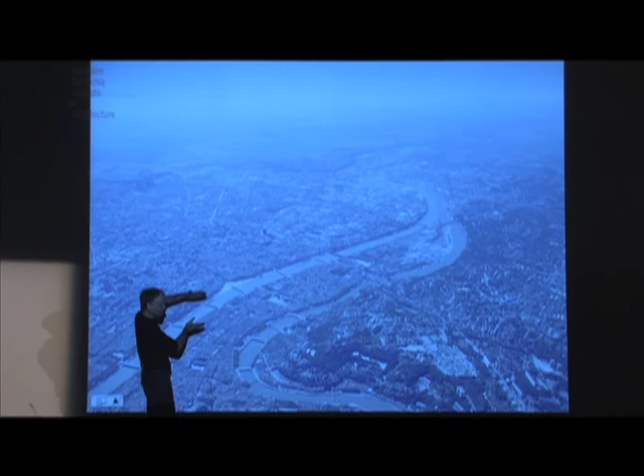Essentially, what you have is this fantastic condition of two rivers that come together, called the Saône and the Rhône. Where they come together at this point is the Museum of Confluences, under construction right now after a long gestation. Old Lyon is based on a kind of Renaissance Italian interest in squares, extraordinary periphery conditions around those squares, a series of intimate square spaces. And of course, these buildings have facades, but really never interact so much with the water, as opposed to the bridges, which are these lineal moves.

And then what you have in Lyon, which is extraordinary, is that all of that stops, and this area was a swampland where we found prisons, hospitals. In a way, the unwanted of the city lived here, and right up until, I would say, even into the late 20th century, this area, which was the old docklands, was a big area of prostitution, drugs, etc. What's interesting is there has been a transformation of this area recently to become one of Europe's, the second largest construction site in Europe, with a series of competitions involving a lot of different architects.

We're involved on this edge here. And that edge is remarkable because just across the way, you have what is really one of only two conditions like it in Europe. One is in Prague, where you have this condition of a bucolic landscape edge coming down into the center of the city. You have this kind of absurd contrast between one side, which is green, bucolic, with vineyards, churches, Catholic institutes, etc., and the other, which today is rapidly becoming an urbanized edge condition. So here we have two sites that we won in the competition along that edge. I can explain it a little better if I move on.

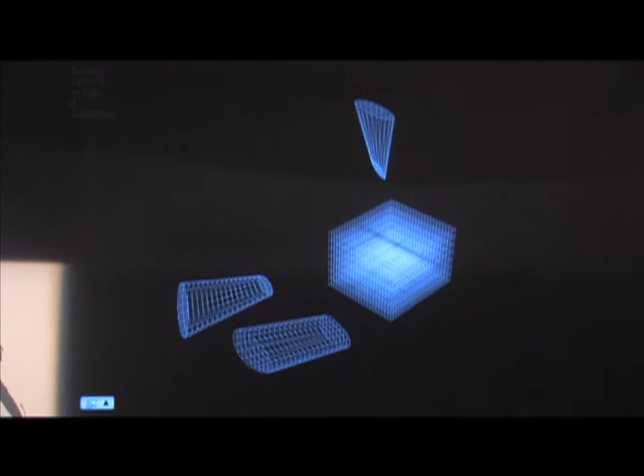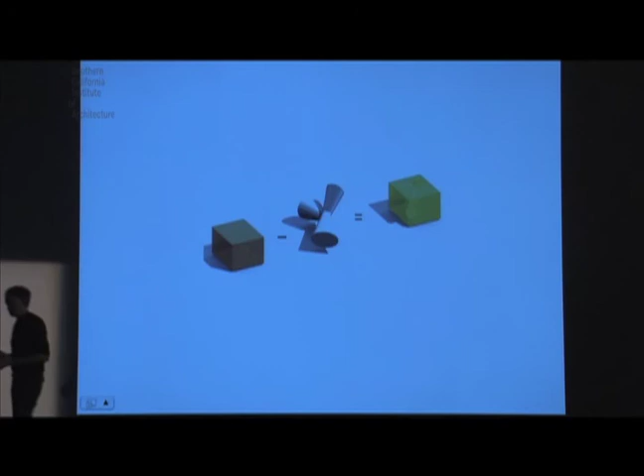So if we develop these further, taking the orange box itself, the orange cube, what's interesting about the tripartite volume is that the normal way of going about a box like this in Europe, as in America, involves very strict rules about how far you can go back in terms of getting natural light into a building for working conditions. After that, you're meant to develop a solid core. Or, inversely, you have a vertical core, a courtyard inside the building, getting light from both sides. In this case, we knew we couldn't do it all the way through, and in a sense we weren't terribly interested in that.

What was interesting with the cultural levels is we didn't need to get any light into those two levels. So it led to this idea of a U or conic condition, which both cores the building and then cores out to the river.

So here we're interested in both the view out to the river and the edge, dealing with this idea that maybe for the first time in Lyon, we can get people to start looking at this natural condition, the river as an edge condition, brought back inside the building. We thought that was a unique chance, because the way Lyon was built in the past, like a lot of cities, was based on precedents, and doesn't really treat the condition of the river and its influence as a fluid medium.

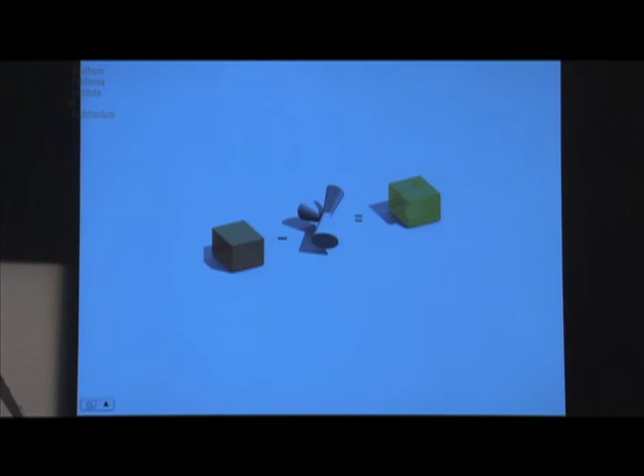So I think what's interesting here is we start to bring some of these interests together. We were also in a district with heavy environmental interests, so we had to come up with rules that could articulate air through the building and climatize it naturally, non-mechanically.

In the end, we have a double solution of mechanical and naturally ventilated design. The idea of the court, of course, is that it can become a chimney for air.

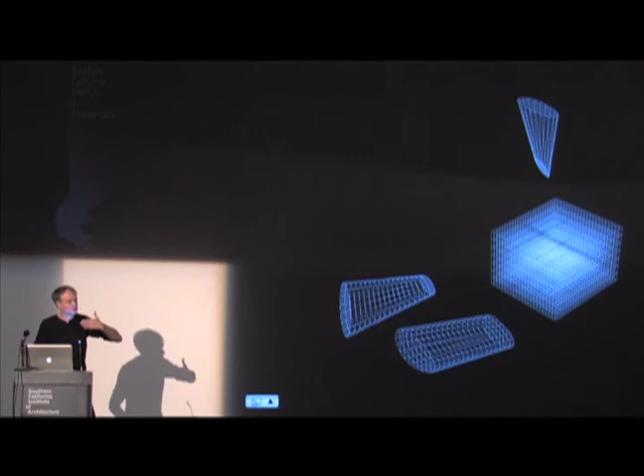What interests me here, like in a lot of projects, is that as you gradually move from conception towards dealing with the micro rules, along with your bigger concepts, those concepts somehow become more informed, or in some cases one deletes or takes out certain things. I think that's a very interesting aspect, because the whole process of building and making something is inherently related to your conceptual ideas, and the validation or non-validation of those. As they move through the project, it essentially has a strengthening effect, this phenomenon of picking up speed with the project, which I think is very important.

So these are just images which start to deal with this idea of conic interventions, leaving a resultant coring of the project as we move through the issues.

There was a series of tests that we did with air conditions, different air movements along the rivers. As you know, rivers through cities are often the major air highways in a climatic sense, so those air highways are very interesting to hook into. In this case, the cone worked really beautifully in terms of bringing air through the building and through a chimney effect, moving up through the roof.

The first building to be built in this sequence is the orange one. One of the pieces we're studying next is this building here, which we'll begin building normally next year, for Euronews as their headquarters, which is an interesting experience. This building works well for them because it's all about seeing and hearing and somehow transforming information.

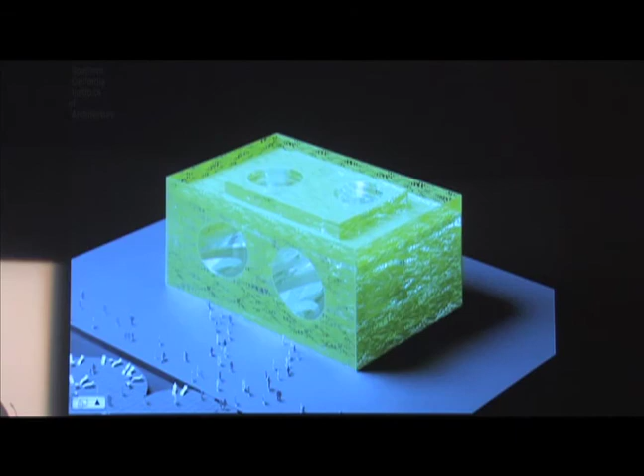Here we're back to the building, the orange cube, which I'm presenting here. Those conic interventions become interesting in a number of ways — I've talked about the air, the views, and the idea of the light.

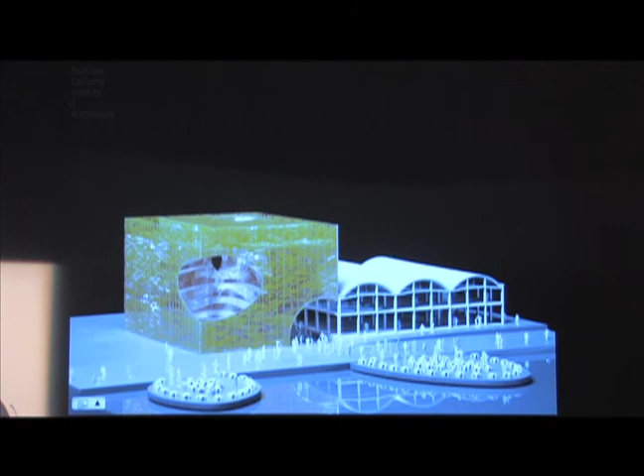Also, our project isn't just involving the orange building, but an earlier building, the salt storage facility. Right along this edge there was a series of industrial units, mostly related to boating on the river — storage facilities for boats pulling up alongside. In this case, the conic volume as an outtake becomes interesting in its relationship, a slight tilting of the hat towards the existing geometric condition of the roofs of the existing salt buildings. These are just models taking us through the site plan.

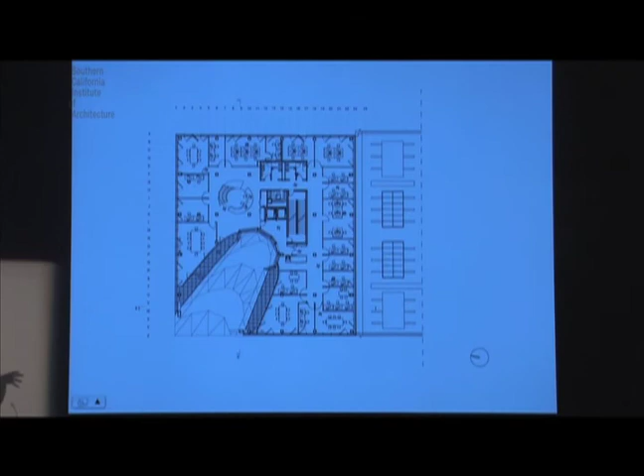Looking down through these pavilions takes you through the different floor conditions. What we end up with are these very interesting huge balconies on every level, giving all the participants within the building the ability to go out, have a cigarette, or use the space as a communal space. We see these as a kind of communal window space onto the river.

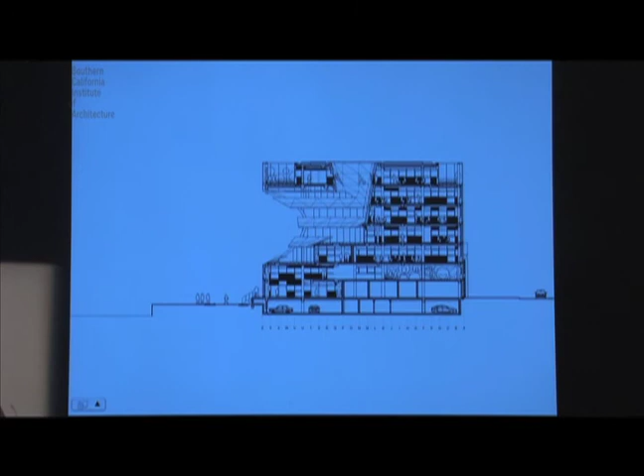But it's a strange space because it's both a window, a chimney, and a light condition. It's porous, and that porosity can be seen in these different views. And here we are under construction — it's still not exactly finished, but we're very close. These are photos from this year.

As we move around the building, what we end up with is kind of a parallel climatic element, which is quite important — the skin. We have a double layer skin. The inner one acts thermally, dealing with all the thermal problems of capacity, input, and outtake of the building throughout all the seasons. The outside skin, which is almost like a lace skin, deals with letting as much light into the building while reducing, like a veil, the amount of solar input into the building.

So that's hence how the project developed. I should say what was very interesting is that when we won the competition, as you can see in the models, we imagined them as completely glass blocks, with a serigraph, a frittage on the paint, dealing with these problems of thermal light, etc.

As the thermal laws changed radically in Europe from winning the competition and going into the phase of studying the thing to be built, we went up against a major problem: maybe we couldn't even build the orange box, because the thermal laws negated the idea of doing it in glass. So we had to imagine the building differently, and instead of being transparent, we turned the thing on its head and said, why don't we just start with the idea that the box is completely opaque?

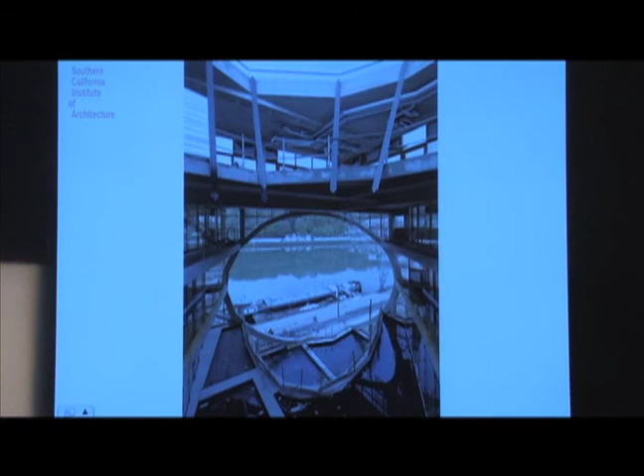So by cutting into that facade, digitally cut, with a digitally cut perforated surface, we started to deal with the problems of thermal and solar intake. These are views out to the river. Each level, as you go up through the building, you have this very strange optical experience of it becoming a cube and moving up into a circle.

And of course the views are different on what they're focusing on from each level. That's the interest of looking across the cone—one starts to see all of the levels and the people working on the different levels.

So what's interesting today is that we have this incredible transparency with the offices—maybe a little bit less transparent than what we showed in that earlier image.

Digitally perforated screens in 3mm aluminium, dealing with the problem of views out but reducing the solar intake, while keeping the box-like quality. And of course the language is a faceted language—none of it is a continuous geometry. Views around the building and views up through.

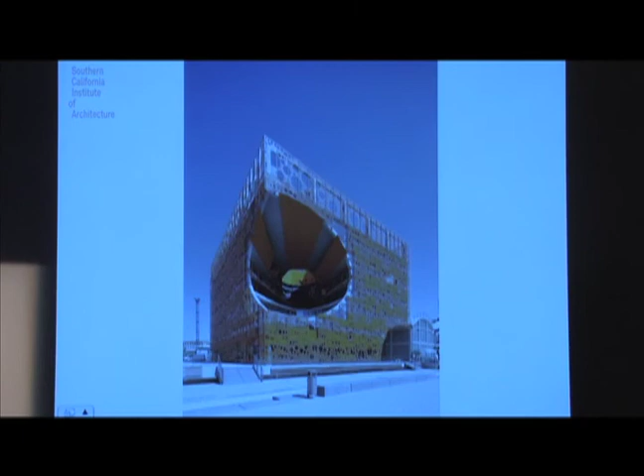Now we're starting to skin the insides of the cones. And we have a terrace volume, which again, urban rules state that the box on the inner part needs to be set back a certain distance from the facade. So urbanistically, there's a whole series of things going on.

This is that terrace space. And views out to the river, inside the offices, an urban view, another urban view—so you can start to see the relation of the river and the boxes.

In the future, what we should have, as shown in an earlier model, are huge floating terraces, which will be floating cafes in front of the water. You can see from the green model that those terraces are, in a way, the materialization of the cones as they come through, or the cone in this case—two of them—as they come through the building and touch the water of the river.

So the light conditions throughout the day—it's the classic ocular stuff. As that light turns, you get this extraordinary orange glow inside the offices. And here we're continuing to skin the beast. These images are about three weeks old.

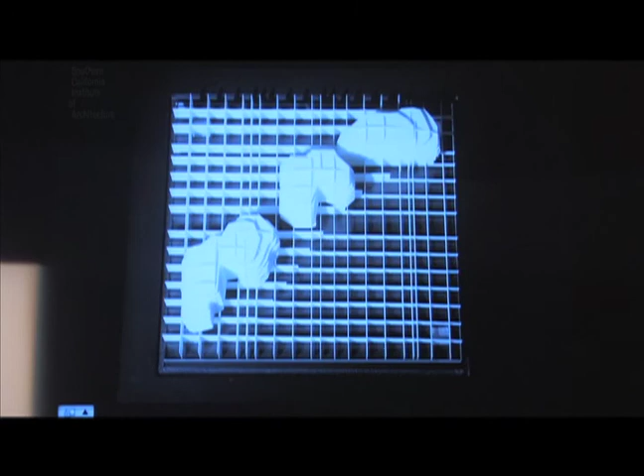And in this case, we had 8 kind of données. The site had been an old hospital in Paris in the 90s. There was a series of trees; we had to preserve about 7 old trees, 100-year-old trees. We had to build with Haussmannian setback lines. There were certain pieces of land with high concentrations of mercury which we could not dig into. And so the car park is split into 3 elements, etc.

So there's all of these things going on, which for us were fascinating, and of course interesting as an architect. You don't avoid them—it's not a rule—but for us, we're very interested in this issue of not avoiding, but actually trying to work with those issues.

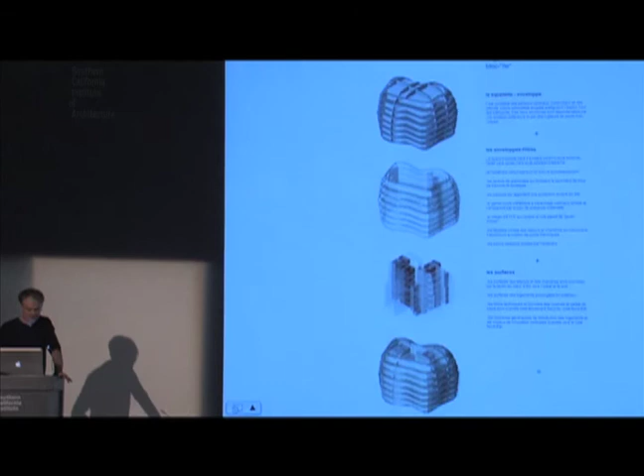So here we are going around the model. This, of course, is a later, finished clarification of what we're trying to do—the resultant elements themselves. This is just an earlier diagram defining, actually, we had huge restrictions, also environmental restrictions.

And again, I'm using the wrong word when I say restrictions, because we see these new environmental laws in France as being actually very interesting. Of course, as a designer, as a creator, to try and work for a better world is not so bad. And so how do we think about these issues that we may have in common? As Eric rightly pointed out, it doesn't come down to which party you're on—it comes down to interests of humanity. And as a designer, we have, as the French say, des chantiers gigantesques devant nous.

We have a lot of work in front of us there. So the interesting issues now, to do with all of this environmental, ecological kinds of issues being talked about in Europe, is that we need to be very careful to quickly move as architects, creators and thinkers with these kinds of rules that are coming to be placed in front of us. Why? Because it's somehow being able to work with them, conceptualize, be creative, and create an architecture that's about thinking, thoughts and ideas, informed by these kinds of issues.

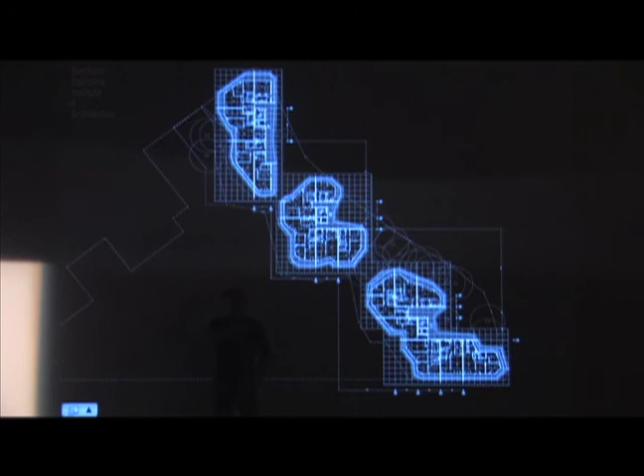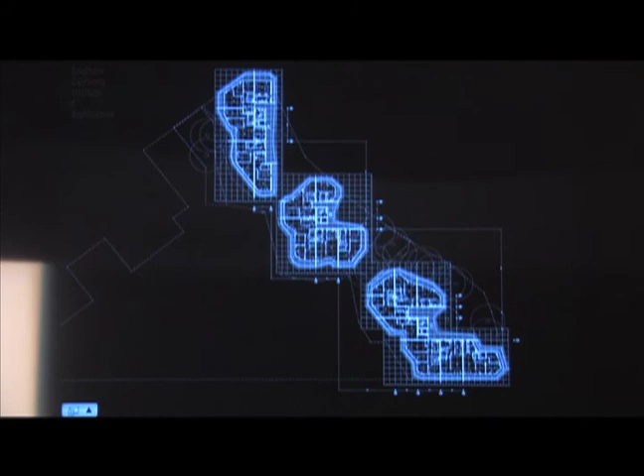In this case, we had a thing called the Jardin d'Hiver, and we came up with a Dutch company with this idea of making a shower curtain, which every owner, every apartment, could pull across in wintertime to create their own thermal space, adding between 8 and 14 meters onto a standard apartment. That was interesting because it's not just the bought square meters of the apartment—it adds on more space, so people end up with a living room in winter.

Hence we have balconies today with television sets, cats, cat play areas, and storerooms for people's unwanted furniture, etc. So in a sense, it's the most communal—the strip becomes, in a way, the most communal.

Becomes the most communal space of the project.

So if I keep going, this is the project from the roof of a nearby building. The solar panels produce 60% of the hot water of the building, so there are interesting issues there. This is the plastic skin as it's being pulled around in wintertime, so they become these sort of three-dimensional, somehow a kind of curtain thing which closes up. And then in the summertime, of course, each apartment is pulled back.

What we also have on each project is the levels, and the datum is quite important. At the level of the ground floor, all of the apartments in this building are for heavily handicapped people. It's social housing, so you don't own the building, you rent it from the city. The heavily handicapped people on this lower floor have a nurse full-time on site. And the garden, in a way, becomes both an extension of the living rooms of the handicapped people, but also a public garden for all of the 100 apartments.

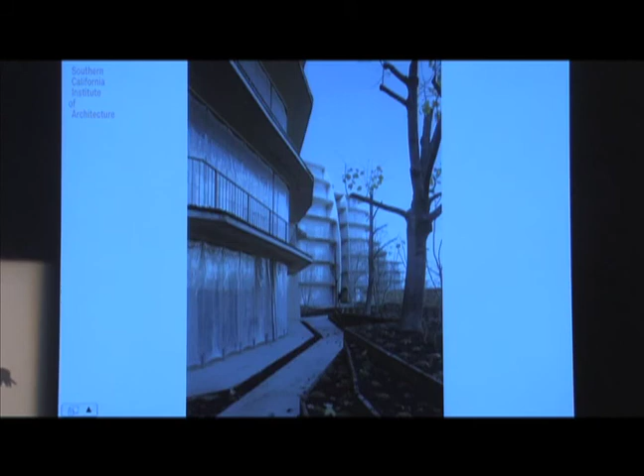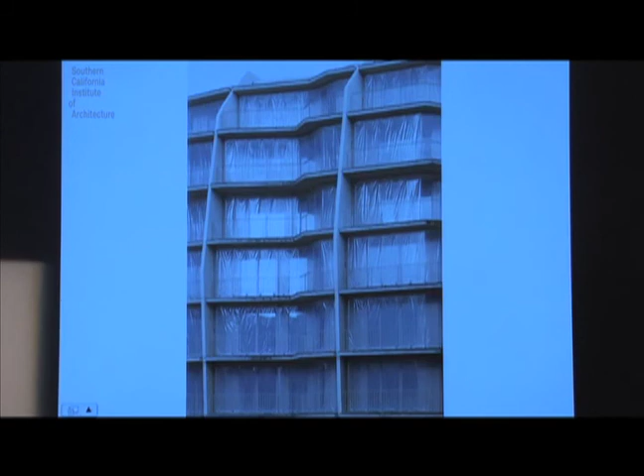That became kind of an interesting issue of how do we create shared space. There's a big problem in public housing between your inner private world and then the street. And somehow, where do people meet each other, talk, hang out, or don't they? In most cases they don't, and if they do, as an architect, you create these kinds of spaces, or in a way create these tensions that can create spaces where people pass time, talk to each other, etc.

So if I'm jumping around a bit, this is the apartment, the plastic curtain which is put in place. It's inside the apartment. Again, it's very sparse, very simple. The budget isn't enormous because again, this is social housing. But the idea is to get a lot of light. They're often complex pieces of geometry.

And in some cases, very large balconies, which become very interesting for people. Again, you can see the rail that holds the curtain. This is one of the guys putting the curtain up.

There's an 85-year-old guy that is seemingly very happy to be living there. And this is the kind of space that we have now.

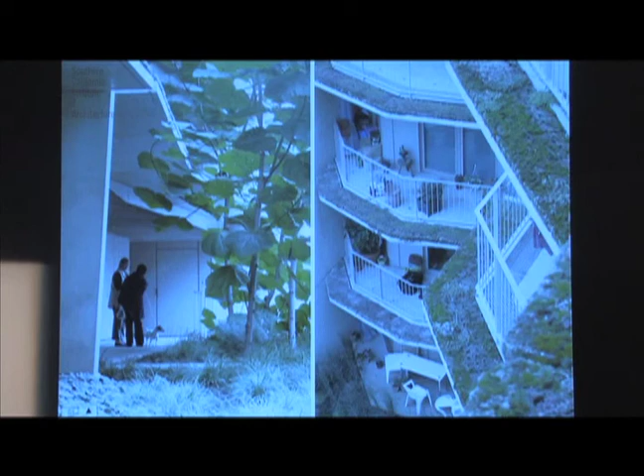We talk about the three hills as having a landscape datum. The primary one is that garden I talked about, and then on each level you have a volcanic rock edge, which is communally fed through a watering system, so it doesn't rely upon the individual watering it. This level, this tooth, as the Italians call it, is a brick on which lichens, mosses, and a series of different plants are seeded that grow at different times of the year on that edge. These feed into the communal spaces.

This is when the tree, one of the 100-year-old trees, has been really tightly cut back during the construction phase. But each of the buildings somehow becomes built, of course, around the space of the tree, and therefore becomes these.

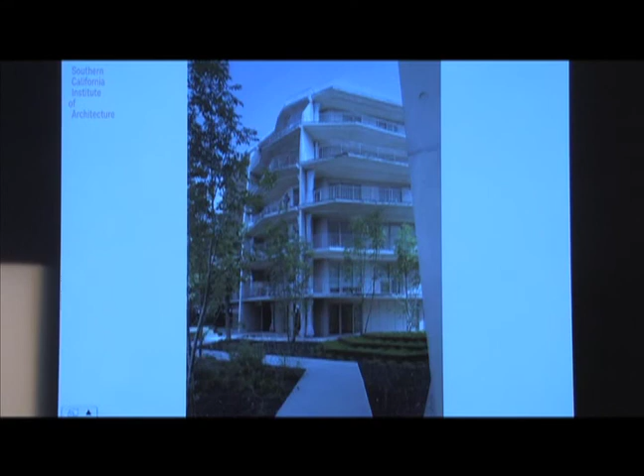Again, there's an aspect of how I was talking about this kind of eating out into the mews, this datum running through to the third building. You can see the boulevard there. So we drop a lot of height down into the lower conditions, into which we bring cars, etc. And viewed from a garden space which will be turned into communal gardening for the city at a later date, showing, in a way, the different levels and the way people are living on those levels.

The relationship between the three pieces. The project that Eric was talking about is the city. In French, it's called the City of Mode and Design, and it's this piece which in English, of course, is the City of Design and Fashion.

And why it's called that is because it was an international competition. We were 12 people that were finally selected. And each team, it was kind of an interesting case because a developer came to us and said, 'You want to be part of our team to come up with a proposal.'

We sort of balked at it in the initial stages because you're working with a developer and coming up with a piece of architecture, it's all going to cost money, and will we really be able to do anything finally. But we jumped on board anyway because, like any architect, you don't really balk for too long. And a lot of work, certainly, in this case we worked for a long time with them.

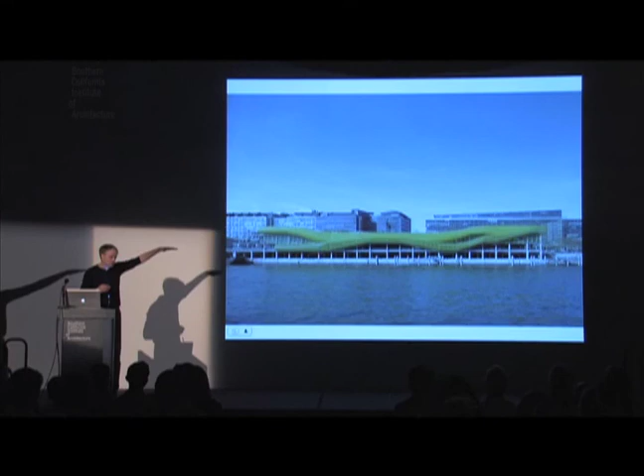As I was explaining to Eric before the conference, we've just had a big art fair inside the building on 3 levels called Chic, which just finished 5 days of having all of the Parisian public through the building, including major installation artwork on the terrace and galleries from all over the world in the exhibition area.

That was an exciting moment, and what we've had this year is the design fair, also in the building, with exhibitions by design schools from around Europe showing inside the building. So what's happening is the building is gradually starting to live and being opened up. We're not fully running in the left part of the building yet, but we hope to be running full-time soon. So the building's still not completely open.

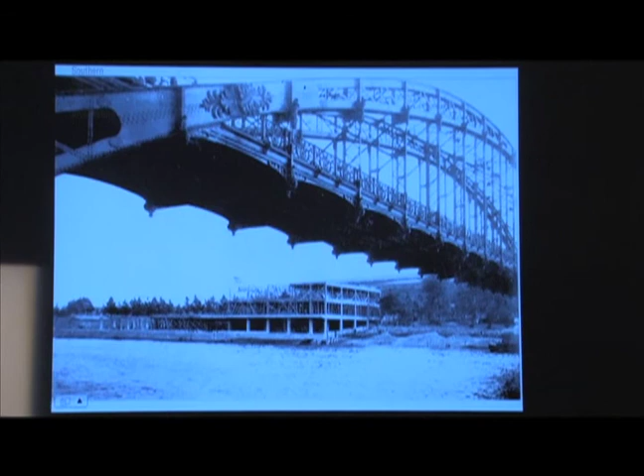Anyway, if I'm going to move a bit faster, I'm sure I should, that's the context. We're in an amazing moment, straddling the 19th and 20th centuries.

In the photo, we have the best of the industrial revolution, or the industrial and decorative version of the industrial revolution above us, and in front, another kind of aspect of that revolution. In this case, it was poured in place reinforced concrete, one of the first prototypes, around 1907. It was a building that interested Le Corbusier a lot, he wrote about it in a text. The Dom-ino House we're talking about is from 1914.

So we're talking about a building in the heart of Paris, and it was an ugly building. Parisians never liked it, but they were aware of it, and it's called the Docks of Paris. Like Lyon, I don't know why, but we end up with 2 projects in parallel conditions, one in the middle of France, one in Paris, both dealing with the issue of taking goods off boats, putting them in a building, and then dispersing them by steam train, horse and cart, etc. But the photo again is fantastic.

In the foreground you have people, I don't know what they were doing, searching, like an image of the Thames where people are searching in the silt, with a kind of primal, muddy emergence of water and slush. And in the background, you have this long tugboat, ocean liner of a thing. It was already actually a thing at that point somehow.

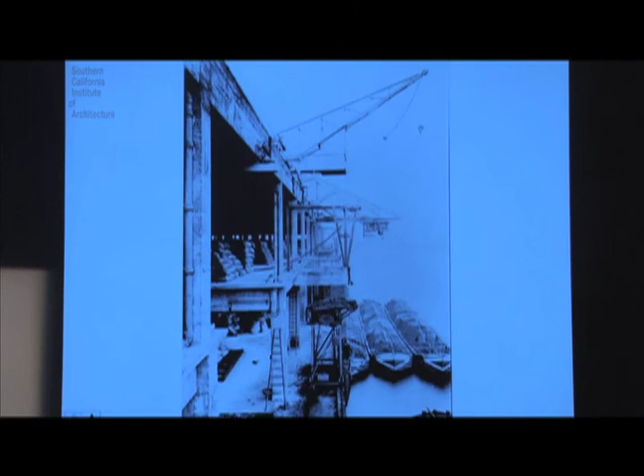And this thing ran across the roof on a rail track system. We're talking about a kind of... I don't know what you call them in America, but you know, the mechanism where you put money in and it goes along and goes up and grabs you a Mars bar or something. In a sense, this is a massive piece of that kind of equipment already built, as you can imagine, in a tilting moment between the 19th and 20th century.

Interesting stuff, and of course a building which would go on to influence the world. Here you can see the aspect of those cranes. On the back, what's really weird is that you had horse and dray taking all these goods off by horse and cart into the rest of Paris, or by locomotive under the building. So it's a piece of early infrastructure.

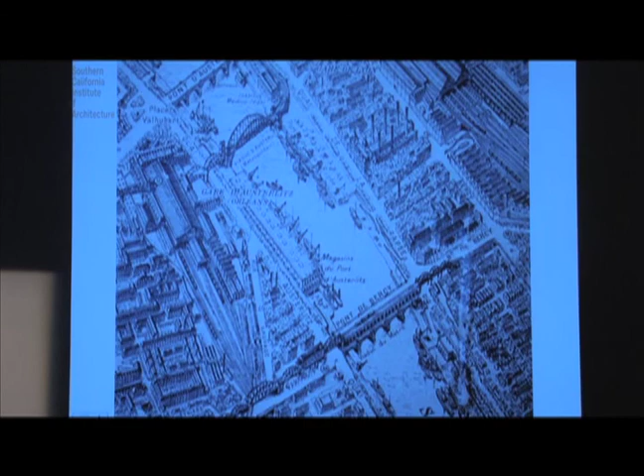As I said, it was considered to be quite ugly. It was never... we of course now recognize it to be quite beautiful in its own way, but it was, nevertheless, never an interest in creating a facade.

In the 1970s, 80s, you have this construction which is now completely filled with old nightclubs, rundown programs, but actually kind of funky and interesting. And it became also a building quite important to the cinema community in terms of the history of contemporary film, with a number of important movies being filmed in and around the building.

So the city of Paris said to us, do you want to demolish it or keep it, which was crazy. Of course we said in our program, the idea of demolishing it on an environmental level alone was catastrophic. But on these other levels, keeping it as a piece of a moment in history seemed really interesting to us. It gave us, Jakob and MacFarlane, the ability to place what we were going to do in relationship to it. Because I think it would be uninteresting, somehow in our work, to remove it and re-begin.

And so we became fascinated in the structure. We imagined all of this as being cleaned up, which is what we did in the project. And then we placed, as Eric was saying, a plug over. We imagined a kind of new skin, a skin which actually became a new structure, finding, in a way, the rhythm of the building.

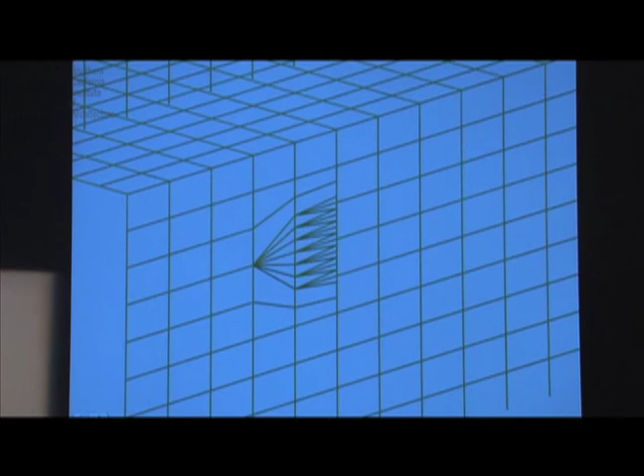So here, using that system, that led us to this whole issue of creating three-dimensional volumetric space, which could be birthed and killed where we wanted, anywhere across the site in a conceptual sense.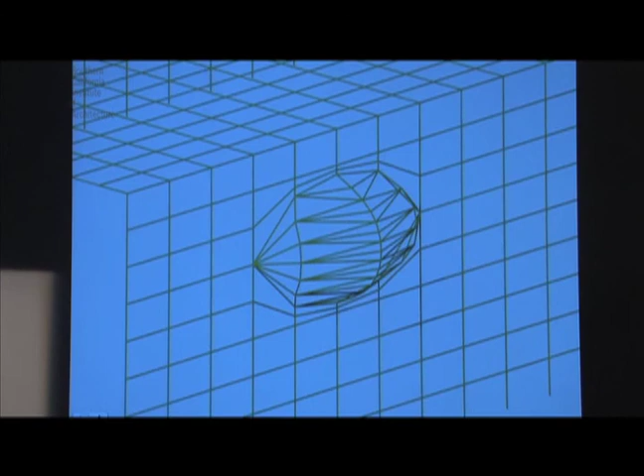So in that sense, we said, well, the most interesting aspect to the project was if we were going to deal with the Seine as the new facade, the front, then that front should really get the walkways, should get the idea of moving the public to the front of the building and then up across those levels.

That was essentially the important movement. The city gave us a 3.8 meter gallery of buildable space. So this thing that I'm calling the gallery, the invisible volume, they gave us that, and then they said you can build up one floor above the existing building.

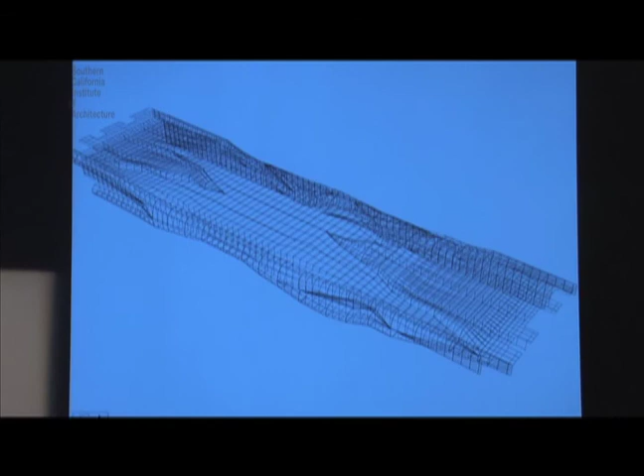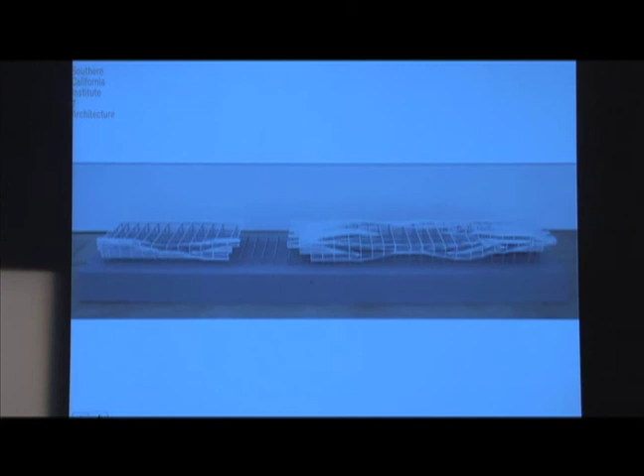So we developed this thing called the plug-over, and this is an early frittage model of it, showing in a sense the conceptual structural discourse between the existing structure in grey and the new in white.

The programmatic pieces, and then the plan, the plan mass, essentially on the roof. Urbanistically, we could build within this area.

We have, of course, the French love their axes, and we come through here. We have Hôpital de la Salpêtrière, which actually is an old hospital. These are the train tracks of Austerlitz train station, and there's a hospital, a little bit like the Pantheon, on axis.

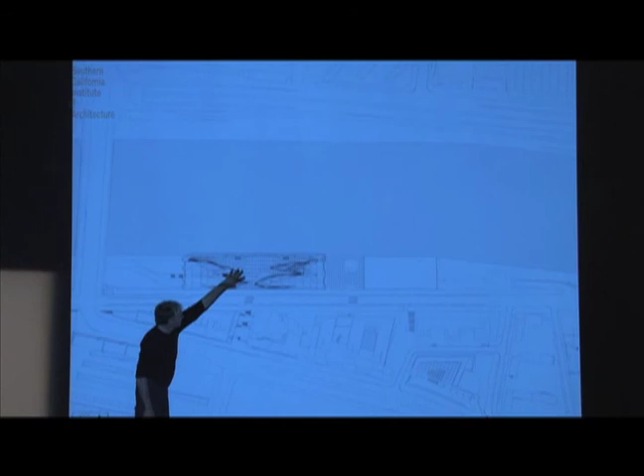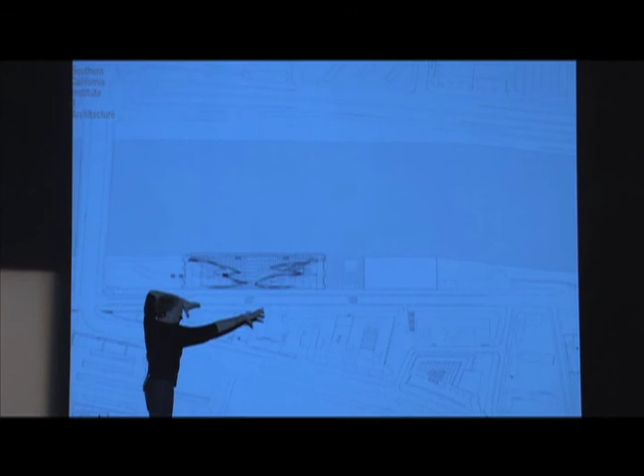So urbanistically, when you're on the roof, you have this extraordinary view out over modern 1970s Paris in the north, and 80s office buildings here, and then through here to the 18th century chapel, which has now become one of the art spaces, where they invite an artist once a year to exhibit inside that Pantheon-like space.

It's an extraordinary place. So anyway, we built to the left and the right, and as you can see, if I take you through the building, this is simply taking you from the level of the quai, where the boats dock, and then up through the building.

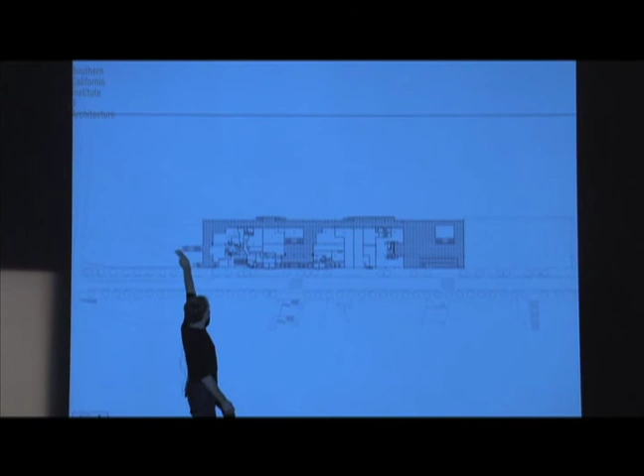So we have different porosities which we wanted to keep. We had conditions of leading from the lower level, the quay, leading from the street, bringing people through the building on that famous axis that the city wanted us to keep, and also bringing people up through a handicap ramp, etc., to that level.

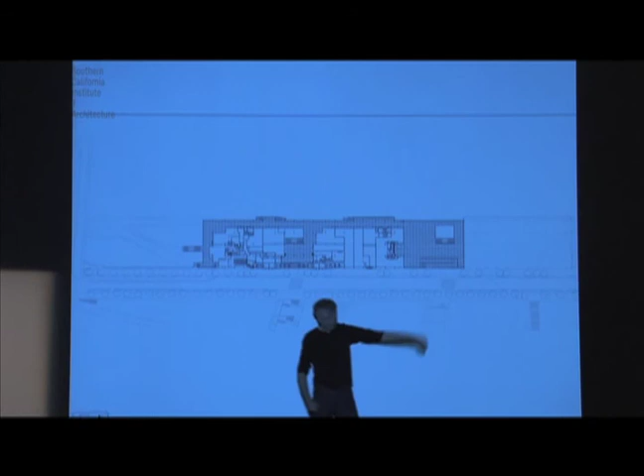So the new project is very much about reaching out into the city and becoming a lot more about filtering and more about connecting. I think that's an extremely important point. And also this idea of developing a linearity, as opposed to a transverse condition before in its history.

We were very aware of a whole new mentality shift that's gone on in the recent history of Paris towards the value of the bicycle, the idea that you're going to slowly get rid of the car from the center of Paris, and you're transforming the edges of the river from being just a museum to being a living river where people are moving up and down boats as they get rid of the cars.

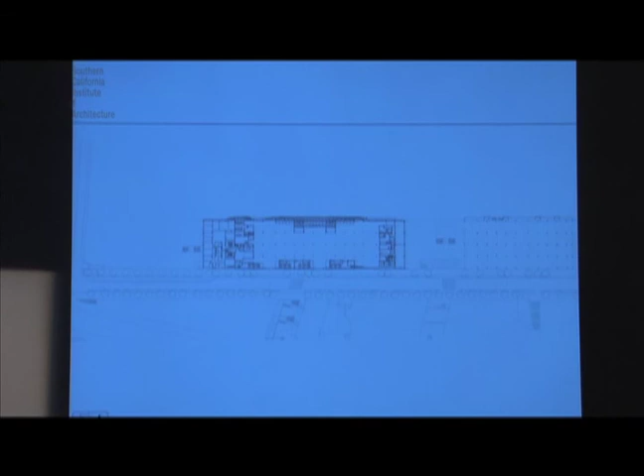They'll be living in cities on both sides of the river outside of Paris, transforming the river again into a kind of water route. This is definitely part of the green plan of Paris, and both edges right through Paris are being slowly transformed. So the building for us was very much about making it part of the city and integrating it absolutely within that future plan.

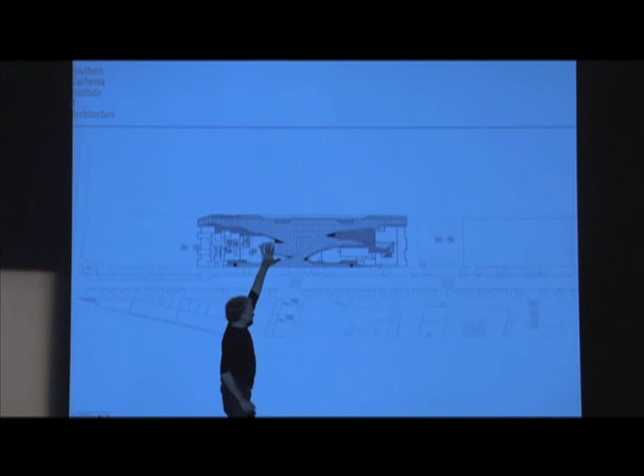And so moving up through the project, what we have at this end of the building is all of the Fashion Institute. We have a gallery space here, another shop here, and then at this end of the building we have a big restaurant going in, and then there's also a cafe.

So the terrace for us is like a new— we've always talked about this building as a kind of prototype for the future, where we can consider the roof spaces. This is nothing new, but it was a very nice opportunity to do it here, to consider the roof spaces as developable, really interesting developable surfaces within the city of Paris, as Paris is being blocked out and densified, or has been. Very few sites are left, except the roof. There's a huge quantity of extraordinary roof conditions.

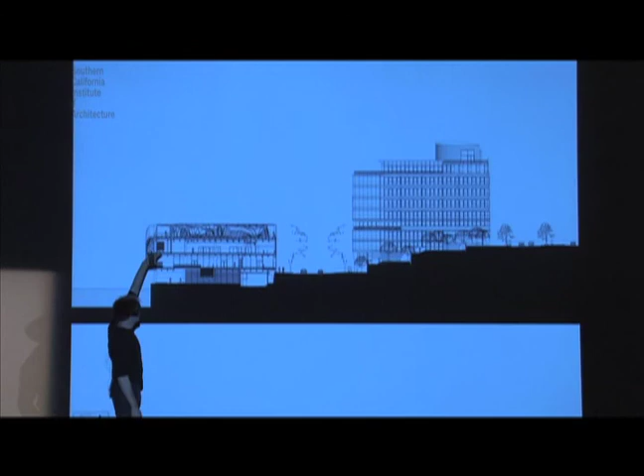So for us, this becomes a very interesting prototype for its possibilities of doing similar things along the river system and in other parts of the city. So we always talked about this as a plus, a new urban plus. What's interesting in that new urban condition—these are just different images up through the thing—is that you have a view out across Paris, and you connect with a completely new vision of both Paris and also the water. The plug-over is this.

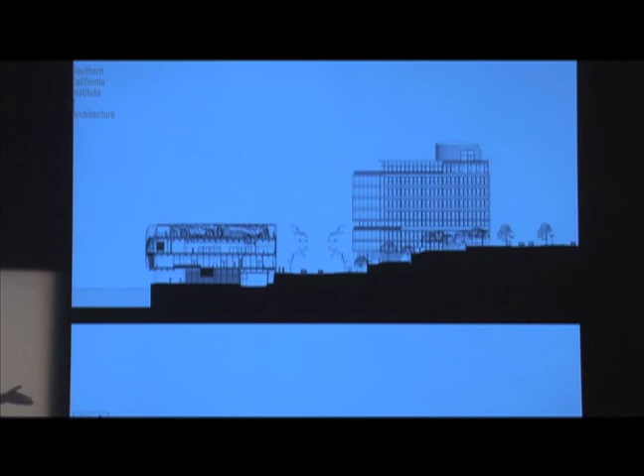It comes across and comes down very thin on that side. So that's like a gigantic U, extruded in terms of its gabarite right along the length. We never considered the building as a finished thing, hence this idea of chopping the building at both ends. It's like a continuous linguini, or whatever you want to call it.

In a sense, it has this kind of appearance, this aspect of appearing. And the way it appears and then disappears isn't so important. Hence this interest in the cuts. The more you build, the more you work, you can see parallels with earlier interests. Georges was about that—we're very interested in this idea of cut.

And it's non-precision somehow, or a non-definitive aspect. Okay, so I'll probably move fast.

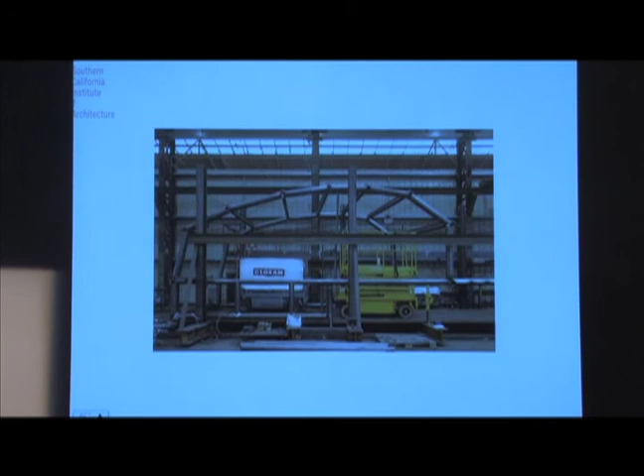Fabrication in Metz, where Shigeru was building the stuff for the museum. The fritage was, in this case, a double-layer piece of glass with the pattern inside. The pattern becomes very interesting because it's another way of bringing, like what we wanted to do with Lyon, but we couldn't—help with reducing the solar intake into the building.

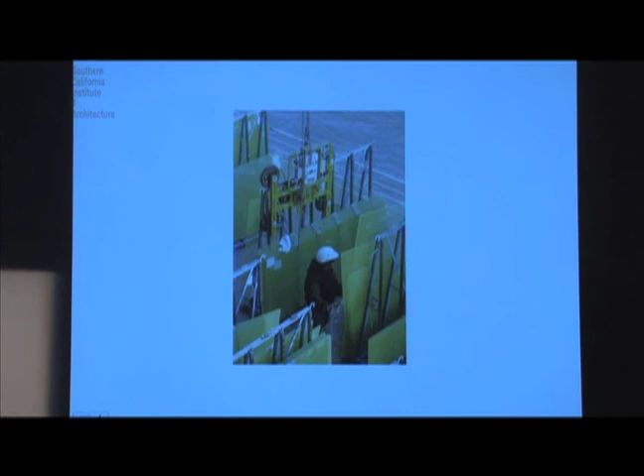We're very interested in structures that are growing over time. This was a nice, easy way of saying it's growing, because it was a construction site—of course, all construction sites grow. But what was spectacular with this one is that we really could play it out over a period of time. I'm not going to show you that, but I'm jumping now to the finished piece in terms of its site, the way it sits.

So here, the condition is kind of extraordinary. Here you have Chemetov's Bercy, where Mr. Sarkozy made his famous speech, looking out towards that.

You have, of course, Perrault's library, and all of the urban condition along here. You can see these buildings in the back—some people say, yeah, but it's awful, what you're surrounded with. That's a kind of ridiculous statement, because I'm actually interested in this idea of awful. Well, not interested exactly, but interested in what's awful and not awful. Somehow what was interesting here is that the neutrality of these buildings gave us the ability of doing something. That was one aspect of how we could make an intervention here, because the city of Paris is an extremely difficult place to make new work in.

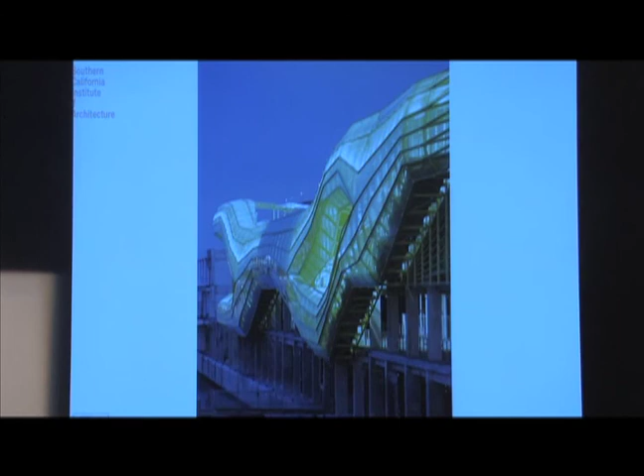And these are views looking out across the plug. The notion of the plug, of course, is that you can move up and down, and you have multiple choices, multiple ways of entering the building from the bottom up, multiple different staircases. Of course, the interest here is that the stair is a crawling stair.

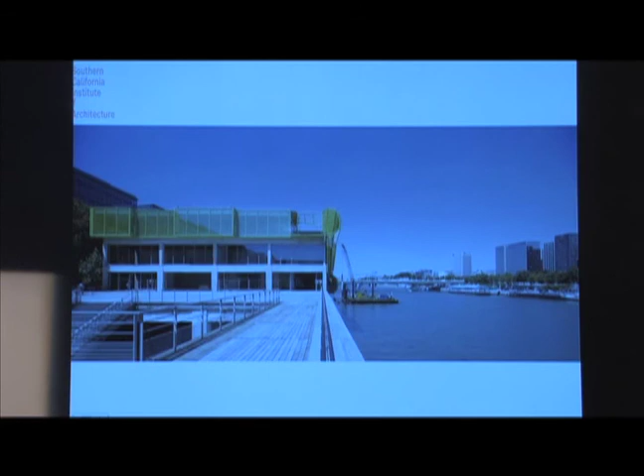That comes out of a long interest we've had in the kind of nautical conditions—or nautical isn't quite the right word—the quai architectures, how ramps come down, steps come down to the water, and then leave and come down along the length, getting into the ancient, older Paris. That's an aspect we were very interested in bringing into the docks project: how do you link an already old thing, somehow separate from its site, back into the site.

And anyway, these are views, different aspects. Moving around, we have a boat which is newly created, the green boat. Here in the image, I don't know if you get it—it's very funny, it's somehow being cut. And so it makes the connection with the water even more meaningful.

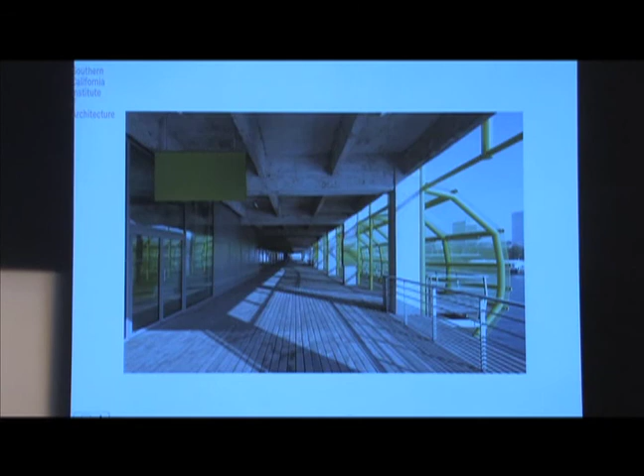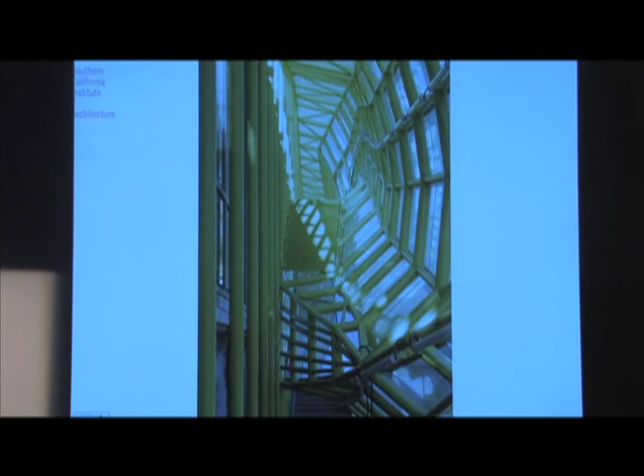So here is the structure that we wanted to keep, because it's an extremely interesting thing. It's a very elegant structure, the kind of thinness of concrete that we would never do today due to the distance between steel and the edge of the concrete surface. But here you have an extraordinary combination of both elegant and quite brute, quite over-designed, fat concrete columns.

And inside the plug over, as we get a transversal, a longitudinal view through that transversal condition. This is just one view of a series of the gallery exhibits that I was talking about, which we appreciate a lot because we're hoping that the interiors of all of these insides will be kept as brute, as rough as possible, because it's an aspect of the docks which is really fantastic.

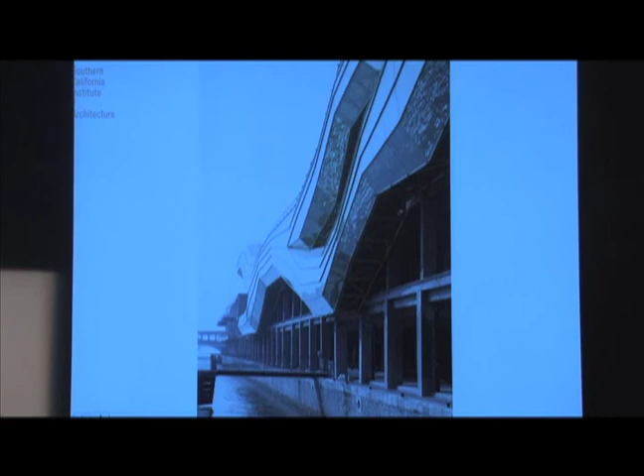Entry for the Fashion Museum and Fashion Institute. That boat, up from the boats, they come in, there's two boats up on the roof, and so we get to look out on the Charles de Gaulle bridge, and in the background, I think you should see Notre Dame, it should be a little bit to the left.

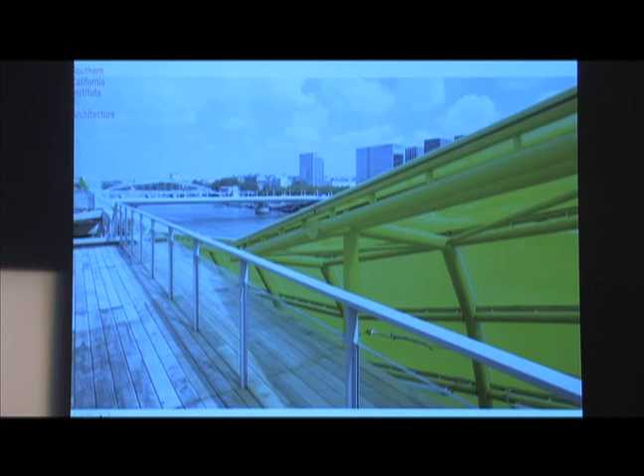And the buildings then across the way, which is the ones I was talking about, these buildings from the 70s, which at night time become very interesting in the relationship with this new urban place, and how you get the volumes, the emerging volumes of the program from the flat surface, moving up and creating a real, in this case, a real landscape, which is a tundra landscape, which is again fed off a system of buried plastic piping inside the roof.

All the wood is French oak, which is renewable. So it's resource-wise, this is quite interesting, and it just happens to be a really beautiful material. And the programs within those.

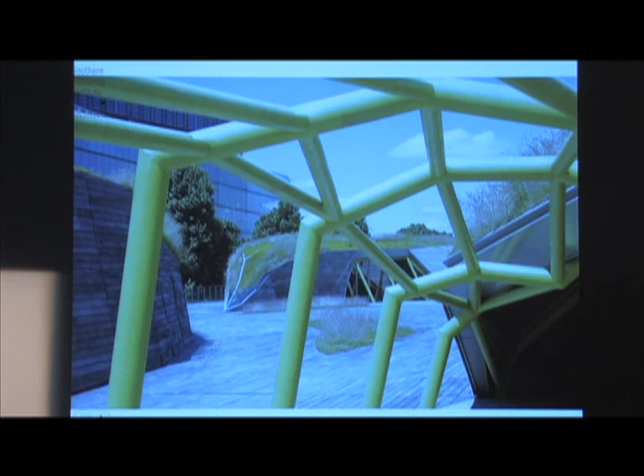Centre Orleans, and this is one of the projects, along with the Orange project, this is the second project which we're presenting in the library tonight for the exhibition.

And the FRAC Centre has had an incredible history with, I would say the world, in terms of a thing called Archilab, which was initiated by Frédéric Migayrou and Marie-Ange Brayer. Frédéric has gone to Centre Pompidou, but still somehow continues a sort of moral interest in the whole site and the functioning and the exhibitions that they'll be doing in the future. Marie-Ange, she was running and is really our direct client for the project.

We won a competition, which was in a way to create - there was an earlier building here. And it's an interesting moment in our career because we've never demolished a bloody thing. We've always built with what we found. But in this case, we came across a problem, which was we needed to liberate the buildings here.

We needed to liberate these and bring the public into a collection, which is the major collection, really one of the major public collections, if not the best major collection of post-1945 architecture models and drawings in the world. And it's never really been shown in its permanent site in Orleans. It's traveled around the world and has never really been shown as a total collection because it's vast and an extraordinary piece.

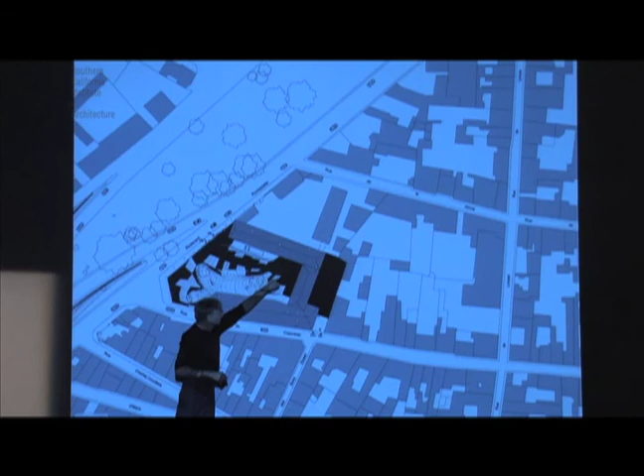The problem for us really in the brief was that we needed to somehow open it up as a site. So in this case, we proposed creating an entry as a kind of strange morphic piece that is born out of three different histories. This is the earliest building, this is a later one, there's a later condition here, and they all have their histories. The geometries of those we brought together, and through their confrontation and mixity, we developed this project called turbulence.

Or turbulent condition - not unlike a kind of condition which we come across as we travel in an aeroplane. And it's a condition which is very interesting because it's about different air masses, different - in a way, I shouldn't say air masses, but the confrontation of different interests and different histories in this case.

So what we developed were three, in a way, chimney-like pieces, though I say chimney-like with hesitancy because I don't think we really have a name for them. The more important piece, the largest one, becomes a signal to the public in the boulevard. The boulevard in this case is a very famous boulevard in Orléans, where the project is situated, one hour south of Paris by train, and it becomes a signal.

So in this project, for the first time, our response was to take away one of the buildings, which blocked this view and this entry into the project. We thought between the two, it's interesting, because sometimes you need to change things, and remove things, in order to benefit the greater whole.

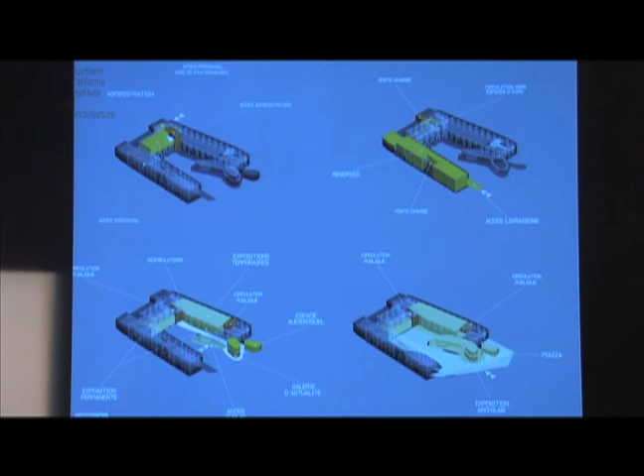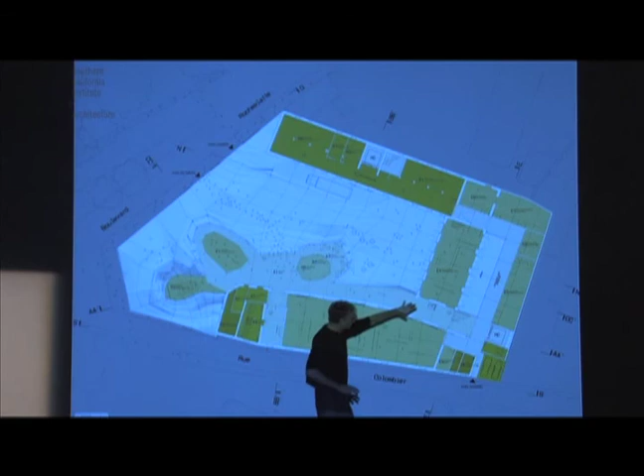So that's what we did, and we developed a project around an entry. As I said, we made a major entry through here. We have a video exhibition space, a gallery dedicated to actuality, recent works. An entry cafe. And then this kind of strange plug-in thing becomes part of the program, where it has to merge and irrigate an existing series of buildings.

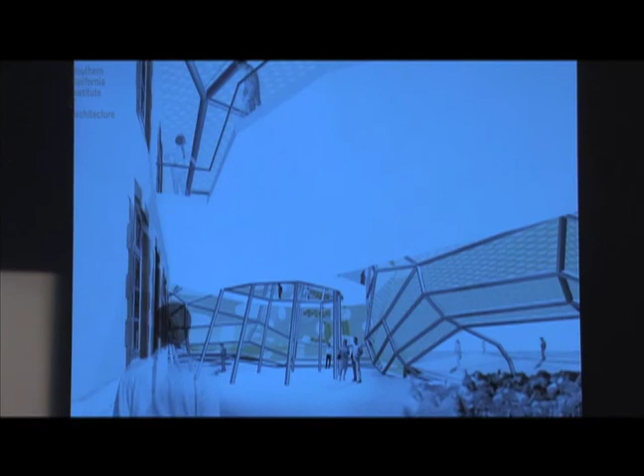Ultimately, as you take cuts through it, the surface becomes this kind of deformed surface up around the building, and the deformation is held up by its own net, this tubular-like structure. As we move around it, you see the view from the courtyard and the view from the street.

The secondary aspect of the project, which is very important, is our work with Electronic Shadow, a regional group of electronic artists in Paris, to create this kind of paysage, a landscape of light, which is a completely performative surface for the city, for the individual, for the institute and the city, and even further afield.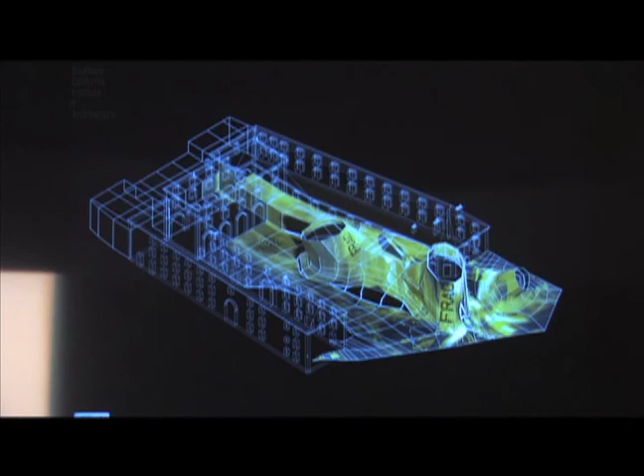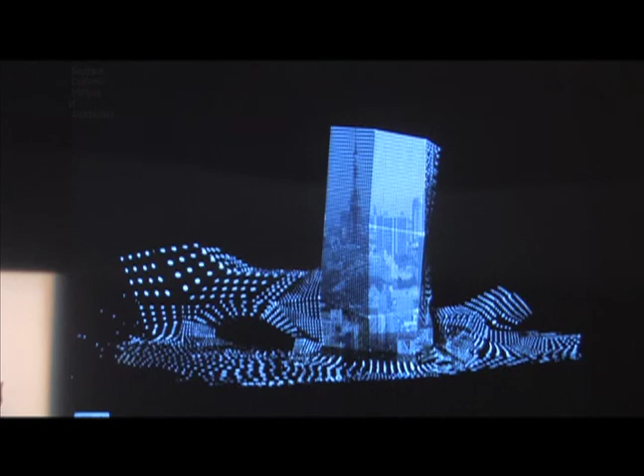So we have a complex program being developed by these artists that deals not just with information as a direct need, but information which is somehow changed by the very surface on which it is being emitted from. Therefore the architecture of the site is having its effect, and vice versa, on that information. I think it's going to be an interesting piece. These are just different drawings following through on the development of the piece.

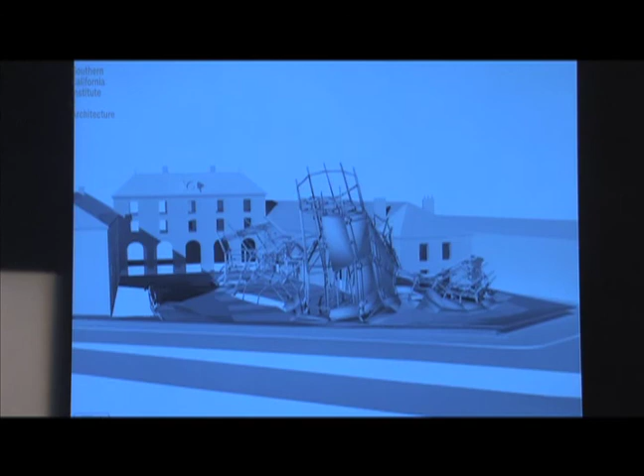It's a really complex structure, and these are the engineer's drawings. The engineer we're working with is an extraordinary group developing models right down to the screws. Although models are one thing and building is always another, so we're still in a phase of doing a lot of work on the project, and as we're under construction as well, we're still developing certain aspects.

These drawings are then being built at a site 100 kilometers from Orléans, and the whole project is built in full scale inside this shed, then dismounted, put onto a truck, and remounted on site. There's a film in the exhibition which shows that a bit more precisely.

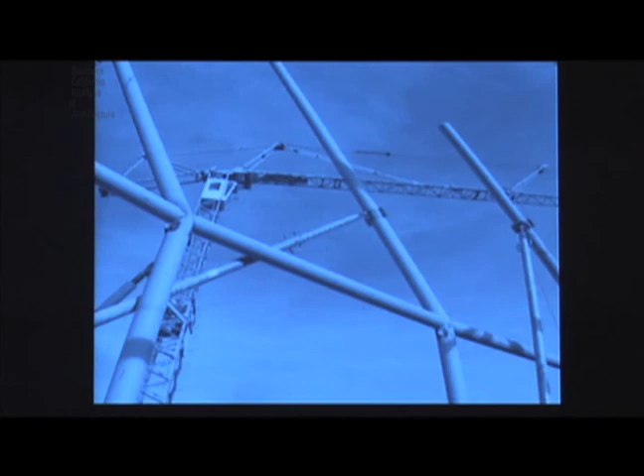The exhibition spaces are in the old buildings, which are remarkable. It's a military storehouse, as well as a food storehouse for the military, an ex-military space. So you have these wonderful spaces with a lot of presence. And as the large tower is being built, this is the video space.

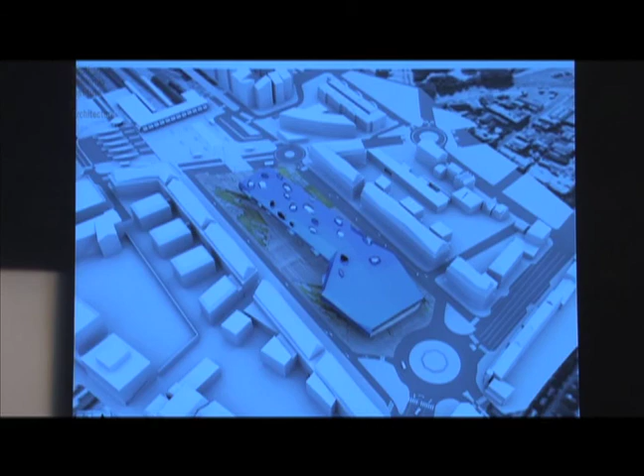Mediatek, this is a lost competition in Saint Malo, but I wanted to show it. It's a piece between the TGV and the city of Saint Malo. Very faint, I apologize, but these are views around the piece. The idea for us was to raise the whole thing up and have the public walking from the TGV towards the old city of Saint Malo, under the building. Very interesting program, because Saint Malo has this extraordinary, world famous cartoon festival, so it involved developing a library mediatek with three cinemas as one total complex.

So, hence, really the immediate cinema part is towards the roundabout at the bottom. The TGV is at the top, of course, and beneath the two we developed this maritime, a kind of micro maritime waterscape, a landscape which mimics the island-like quality of the old city of Saint Malo, which unfortunately I don't show images of, which I should, to give you some idea of each of the windows corresponding to a different part of the program.

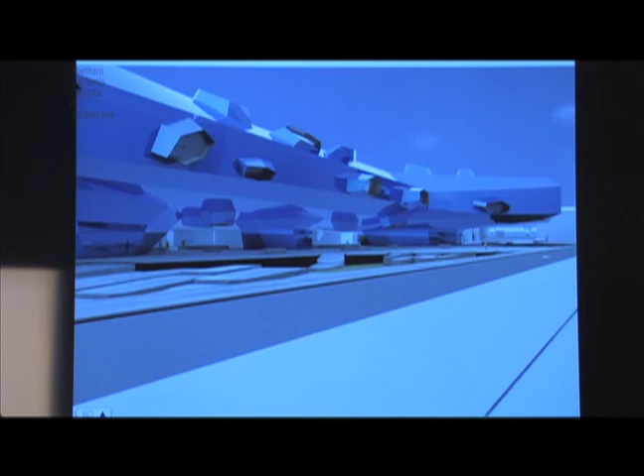Ricard is a group which is really interesting because they're making pastis in the south of Marseille, in the south of France, as well as probably being one of the biggest manufacturers of drinks. But they have a very interesting thing called Foundation Ricard, and they give every year the equivalent of a kind of an Oscar award, a kind of populist equivalent.

So we got to do their gallery space, which is also their foundation space. It's a very interesting site because it's in the middle of a block, hence this block-like intervention. Essentially, it's extremely simple - it's essentially a white box. The only thing is the walls are 25 centimeters away from the old walls, which gives artists an amazing ability to come in and make interventions - electronic, whatever interventions - within the walls of the space.

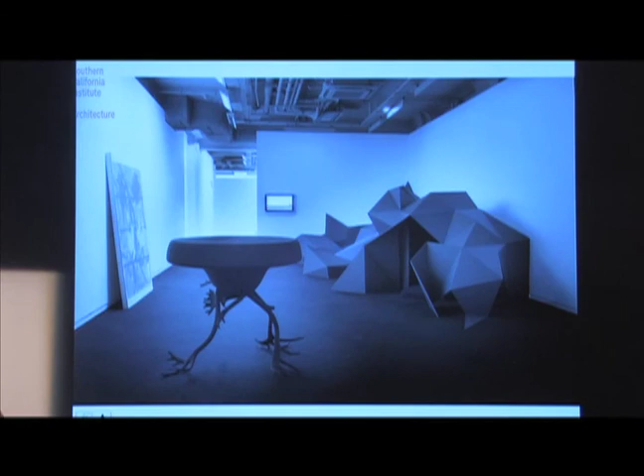Essentially, all the plumbing, etc., of the building above is left exposed, and so it's very... I would encourage you when you're in Paris just to go by and see, because it's a very exciting collection of work that they're constantly showing of young work in the French art scene.

And then we made this thing called the bar, which is based on the rising or lowering sun of Marseille, which is really an early symbol of pastis. Mr. Ricard was this phenomenal character who supported a lot of philanthropic interests in France and around the world, so it's a kind of homage to this person as well as the society. But more importantly, it's a space which becomes a gathering point for different events within the foundation.

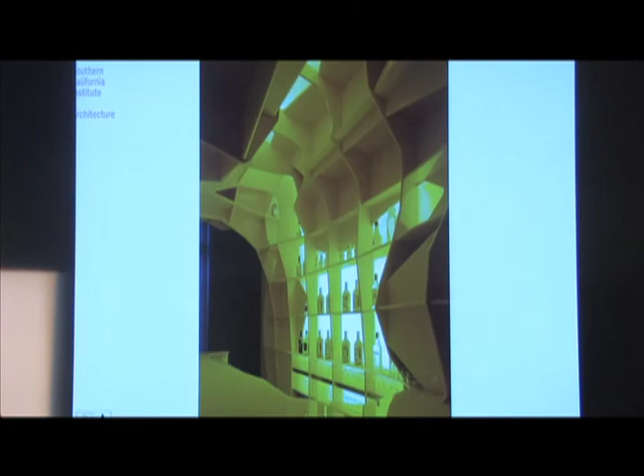So its method, in a sense, is localized maybe back in the work of Florence Loewy, but again, that's something we developed for this project. This is a recent competition that we won for a School of Graphic Design in Pau, in the south of France, near the Basque part of France.

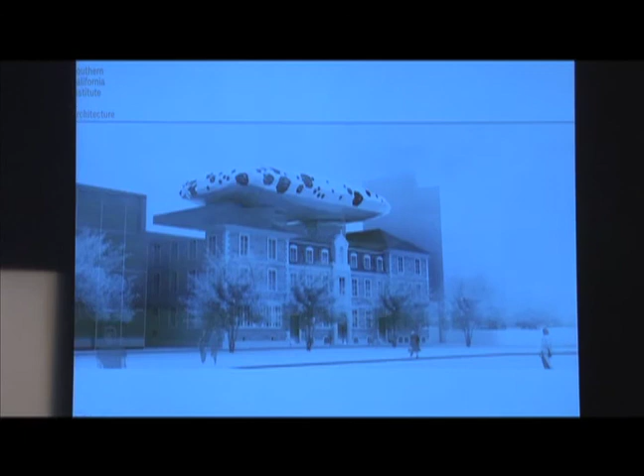It's a city called Pau, which overlooks the Pyrenees. We built on top of a Catholic girls' school a complete new intervention - a mediathèque which would also be a roof deck and cafe at the level of the railings, and then a complete mediathèque, classes, etc. above. These are just basically competition images, which I'm sharing with you.

Taipei - I'm going to finish on Taipei Performing Arts, because it was a project we did absurdly fast, and sometimes maybe making fast things is not so bad. We got 4th place. Koolhaas got, of course, 1st. I'm not too sure where they are with the project. But in this case...

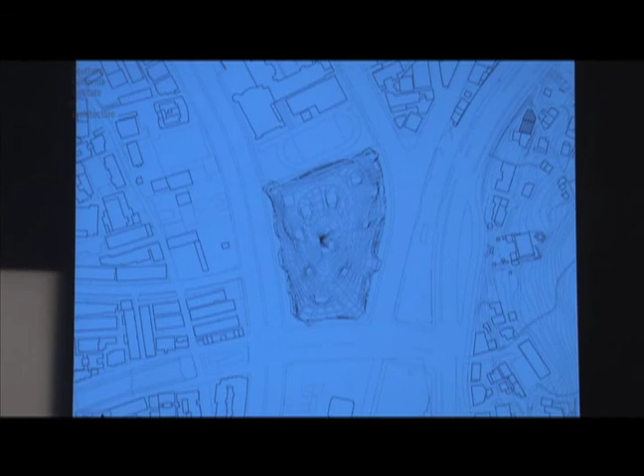Our project was based on the idea of a relationship between red bamboo, or a red tree, and silkworms, as they weaved their skin around a series of theatres and performance spaces, as well as letting the city filter through the site. I'm sure you've seen a lot of different projects that came out of this competition. It was a very interesting site, and Taipei, of course, today is still one of these remarkable cities in terms of the recent number of competitions they've been producing.